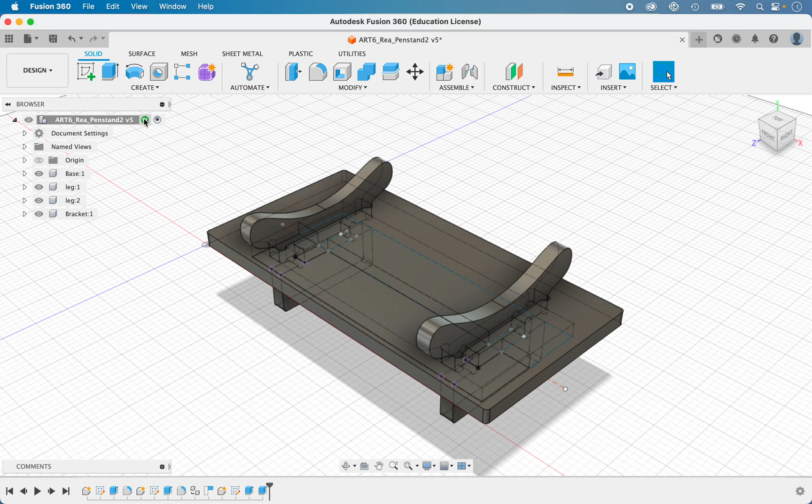Right now the top layer of the browser tree is activated, and you can see all of the steps we've used to create this pen stand. Let's go down here and activate bracket, and you can see how the timeline is simplified. This is only the information associated with this component.

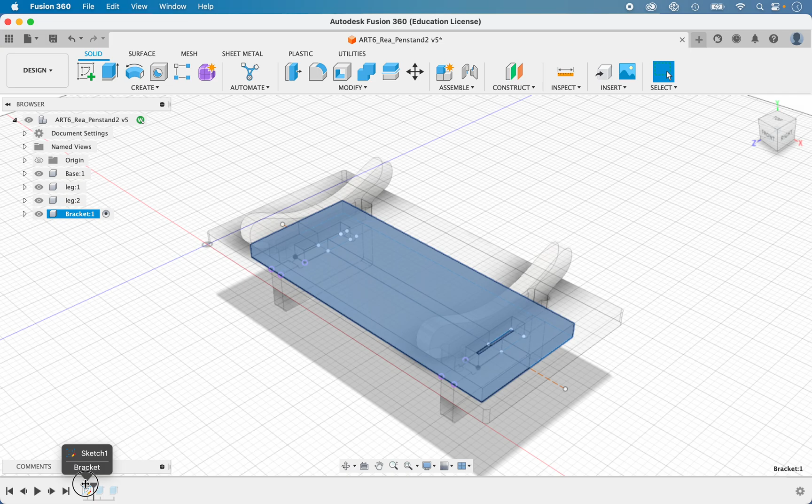First, let's move back in the timeline to just before the sketch, and we'll edit our sketch, right-clicking on the sketch, edit sketch. Let's turn off the base and the legs to make it visually more clear.

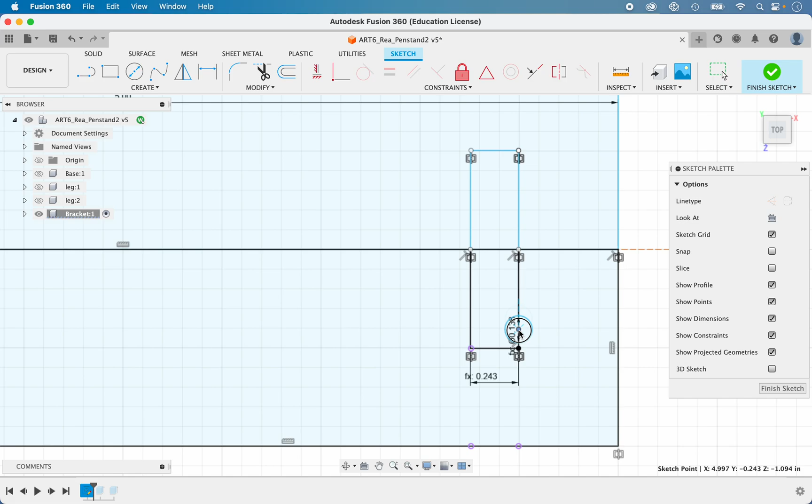And let's go in here and add some of our dog bones. We'll take the center circle, click above where we want it to be, and we'll use tool diameter to define that circle. Then we'll grab it by the center point and pull it down. Let's do that 3 more times.

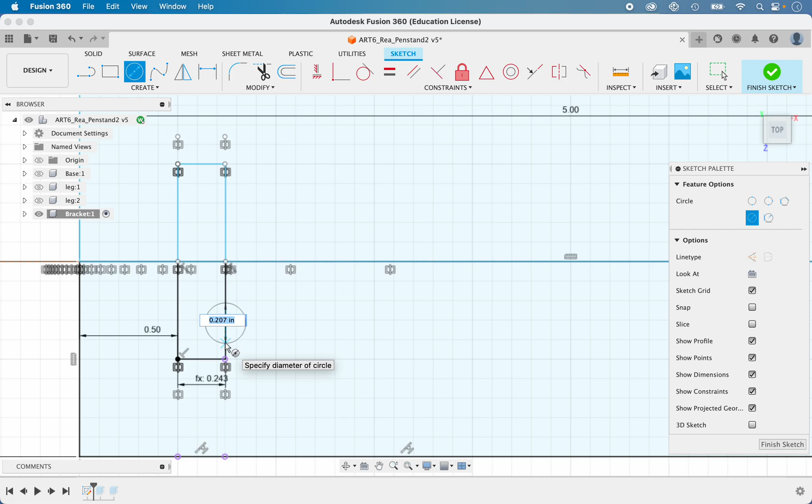And we'll come over to this side, and one last time. Okay, so now we have our dog bones for this side of the bracket.

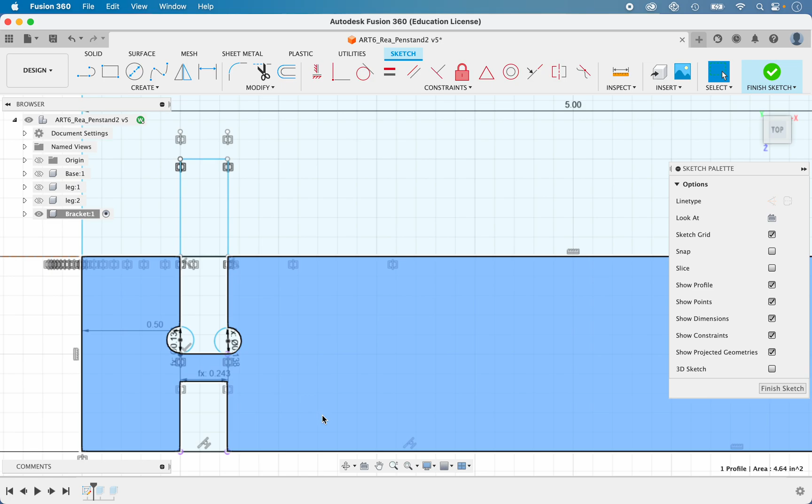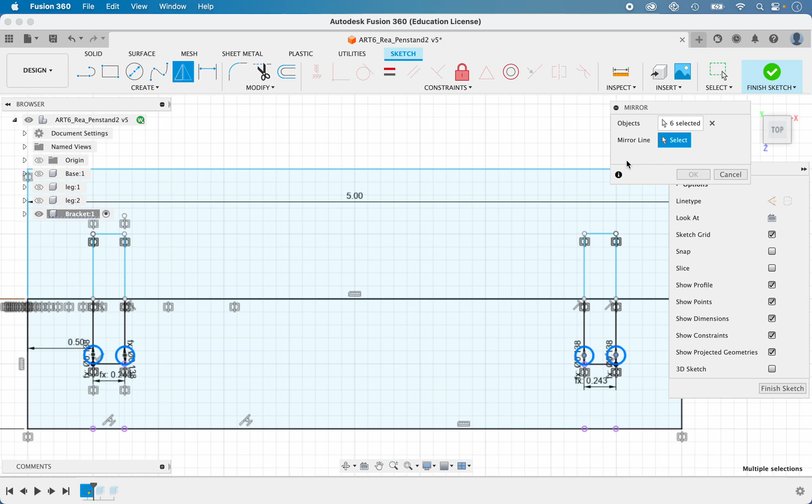Let's put them up on the other side by using mirroring. We'll select our circles. There we go. And now select our mirror line. And there we go, they've populated above. We'll click OK.

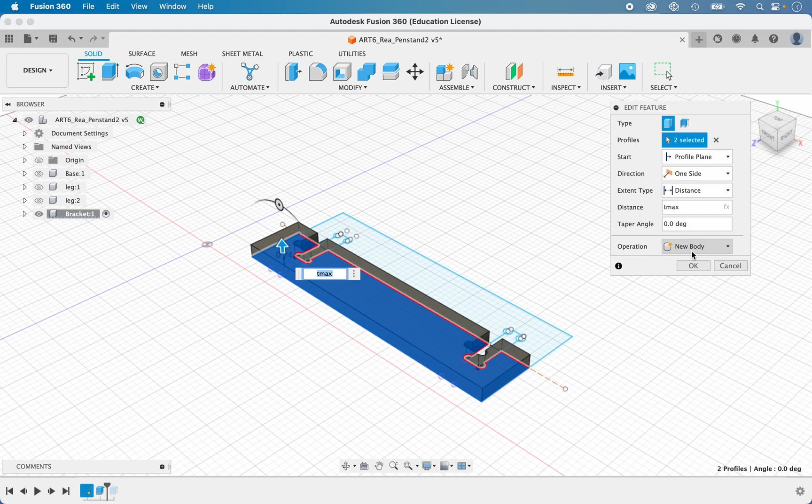So now when we click Finish Sketch, we can move in the timeline to show the first extrusion, and it does not yet have those dog bones, so we will right-click or control-click on that feature. Go to Edit Feature. The fastest way to do this is to X out of everything that had been selected before and just select the profiles again. It repopulates Tmax and it retains the new body designation.

We'll click OK there. And while we're here, let's just go ahead and add in a fillet to soften these corners. We'll soften that corner and that corner to 0.06 inches. And now you see that that fillet has been added right there into the timeline associated with that feature, the extrusion.

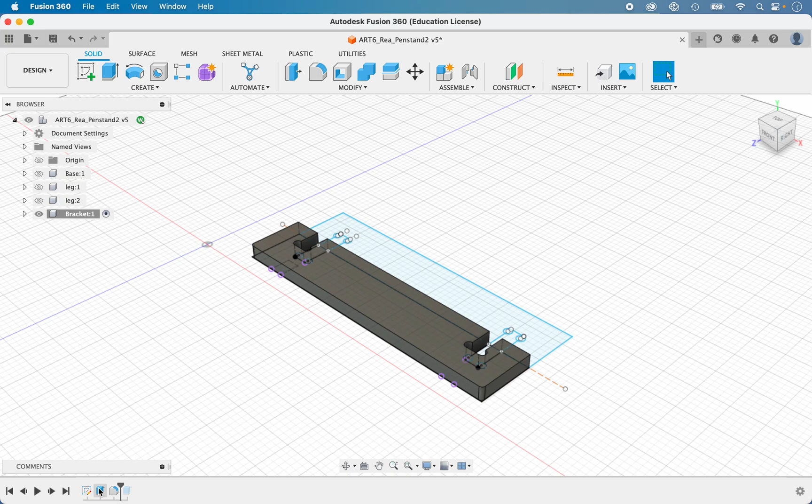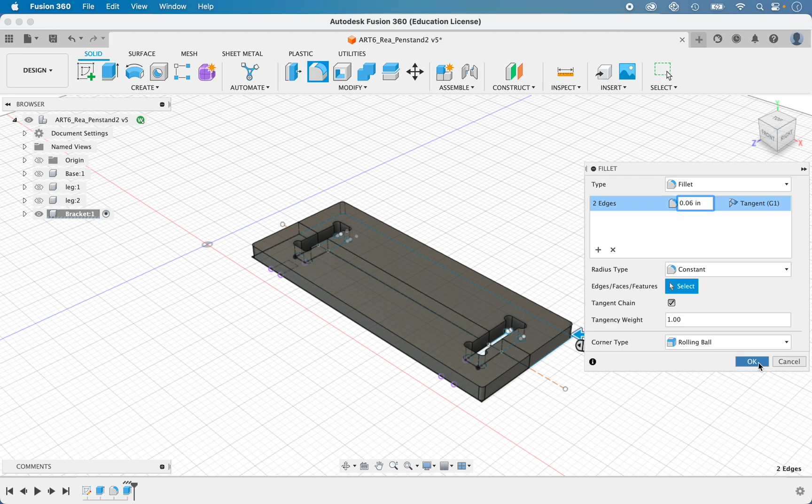Great, so when we go back and click the top layer and turn on visibility of all of these components, we can see now that we have fillets, we have dog bones.

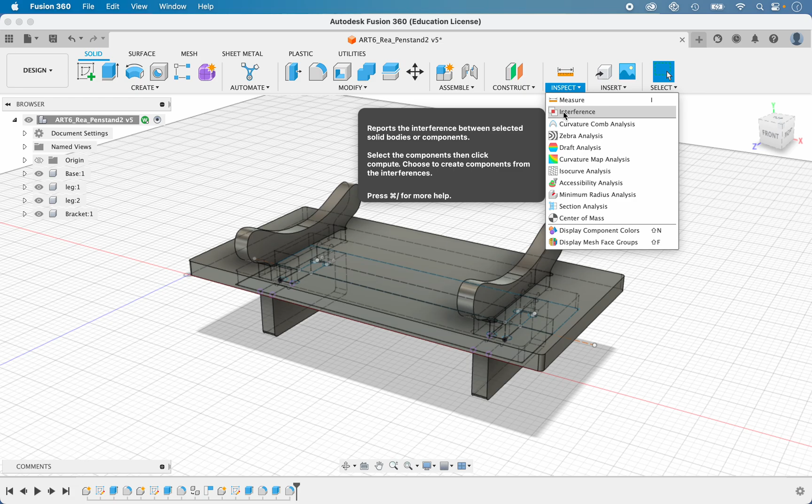It's looking good. But let's give ourselves one last chance to head off any trouble by using Inspect. We'll use Inspect for interference. We'll select everything in the model and let it compute. And it says no interferences are detected, so that's great.

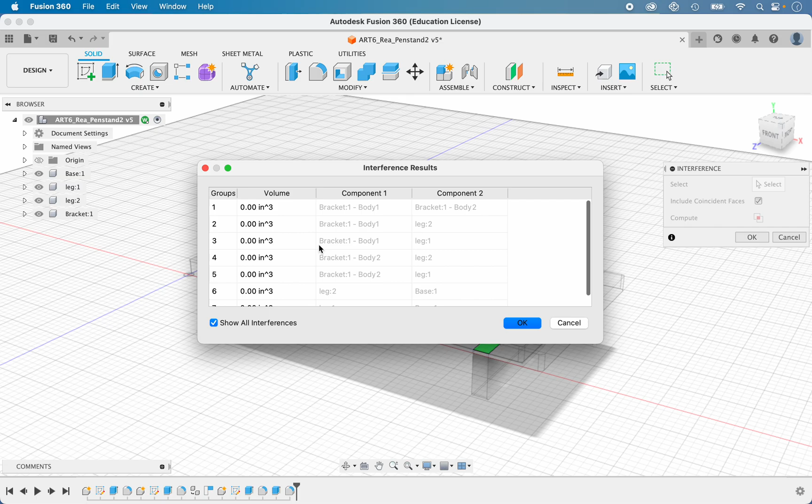So our design is working 3-dimensionally. We can also look for any coincident faces, and you can see that it does list some faces that are touching, but the volume is 0. So there's no interference, there's no overlapping faces. So we're going to be good to go.

All right, so we'll see you in the next video, and we'll start our procedure for going into manufacture and setting this up to be fabricated on the CNC router. See you there.